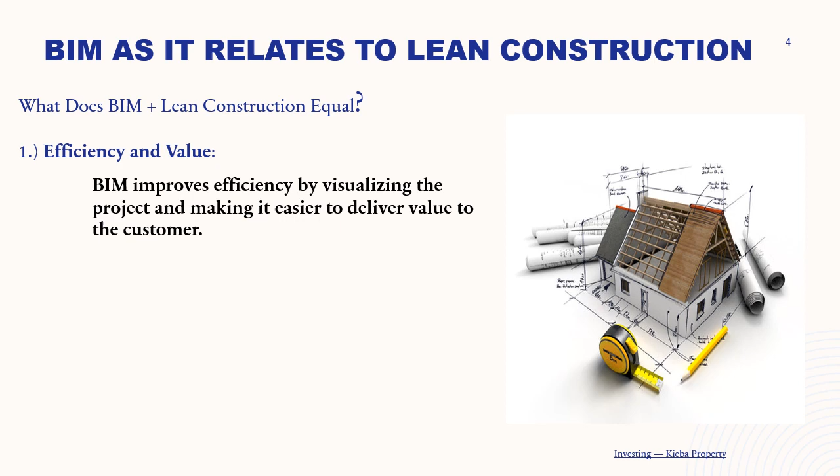How does BIM relate to lean construction? We'll start with efficiency and value. BIM allows for the creation of a highly detailed 3D model that provides a visual representation of the project inside and out. With this visual model, everyone involved can better understand what the final building will look like and how it will function, making it easier to deliver value to the customer. It can also eliminate waste through accurate planning, reducing the likelihood of design errors and changes, which are a significant source of waste in construction.

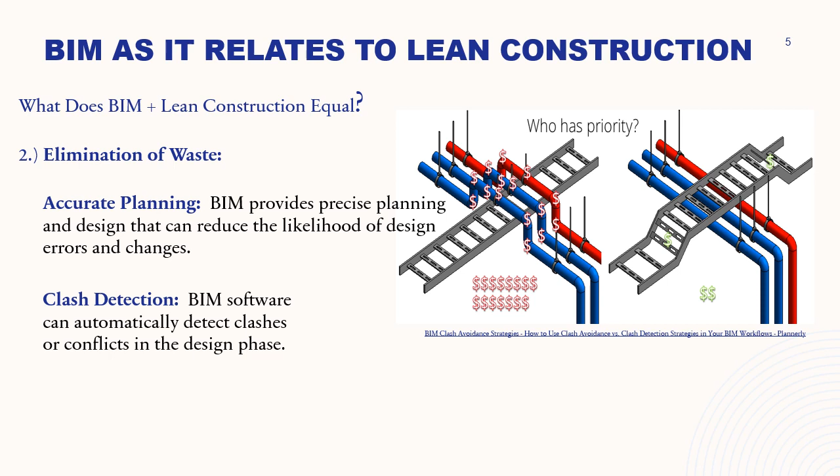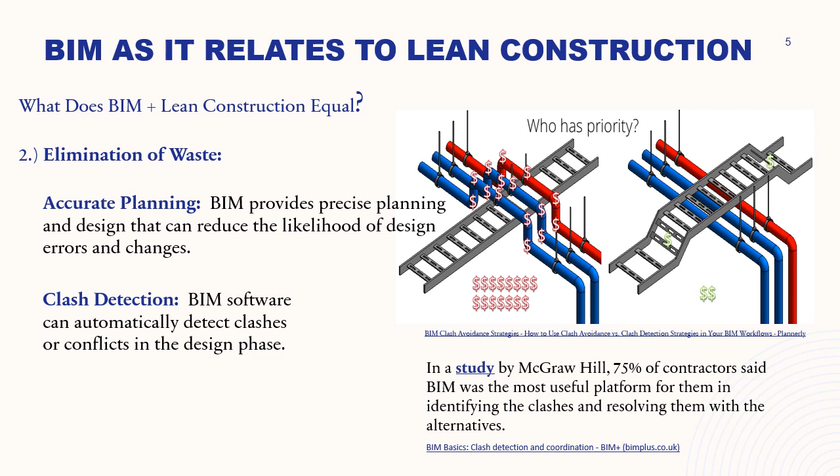The second one is clash detection. BIM software can automatically detect clashes or conflicts in the design phase. A project essentially involves engineers, architects, and contractors of different trades. However, when so many disciplines work together, clashes are inevitable. If not resolved, these clashes can result in reworks, meaning wasted time, labor, and cost overruns. A study by McGraw-Hill found that 75% of contractors said BIM was the most useful platform for identifying clashes and resolving them with alternatives.

Another principle of lean construction is pull planning, where BIM can play a crucial role. By adding a layer of scheduling information to a project, you can incorporate the time component into the 3D model, known as 4D modeling. 4D BIM enables visualization of each project stage, making project scheduling and sequencing much easier to understand, plan, and manage. It's like making sure you put on your socks before your shoes - otherwise, it doesn't work.

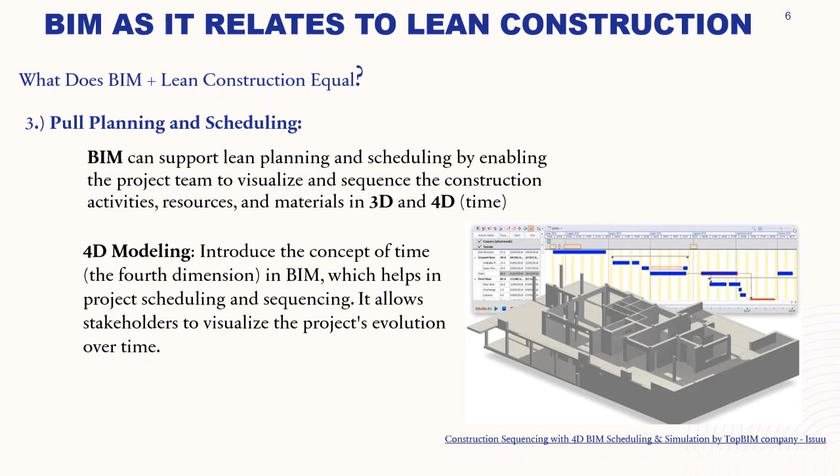Next is respect for people. By providing a shared space for collaboration, BIM promotes mutual respect by acknowledging the unique expertise and importance of each individual's contribution to the overall success of a project.

The last one is continuous learning. Throughout the project life cycle, BIM enables the collection of extensive data, including project timelines, changes, cost tracking, and performance metrics. This helps identify bottlenecks, inefficiencies, and areas of waste. Through this, we can identify patterns and trends, ensuring that lessons learned from previous projects are applied to new ones, leading to higher quality outcomes.

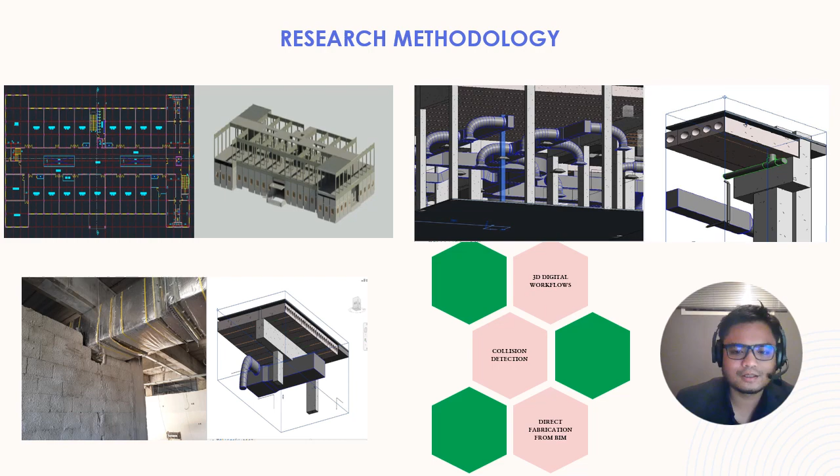The study involved applying various lean and BIM techniques such as 3D digital workflows, collision detection, and direct fabrication from BIM during the design and execution phases. The goal was to explore the benefits of integrating BIM and lean through a real project and share insights gained. This study is part of a broader effort to develop an innovative information flow process model for BIM lean projects.

The conclusion of this study found that building information modeling helps eliminate many wastes during the construction process, such as design errors, poor communication, and unexpected changes in the design during execution. BIM enables creating an accurate model rich in information and free of clashes, which helps make the right decisions during different construction stages.

This study shows that implementing lean using BIM in the design works contributes significantly to the project's efficiency. BIM helped reduce the time required for design progression by nearly 50% by reducing waiting time waste. The BIM model can help save up to 1.5 months by removing the waiting time waste and achieving lean principles.

On the other hand, design reviews and clash detections are BIM-based techniques in minimizing construction and design waste by eliminating errors detected in construction. It can be said that through the BIM model, clash detection can save at least 3 weeks and 72,460 CAD at the university project, which results from design errors.

Even though eliminating all change orders that can arise at any project will be almost impossible, it seems that BIM can reduce the cost and time of change orders, as a result of this study. The most significant reduction in change orders was discovered when BIM was implemented on the project. Approximately 17 out of 20 change orders, or more than 80%, belonging to owner-initiated changes and design errors, might be avoided using the BIM model, making the projects more lean.

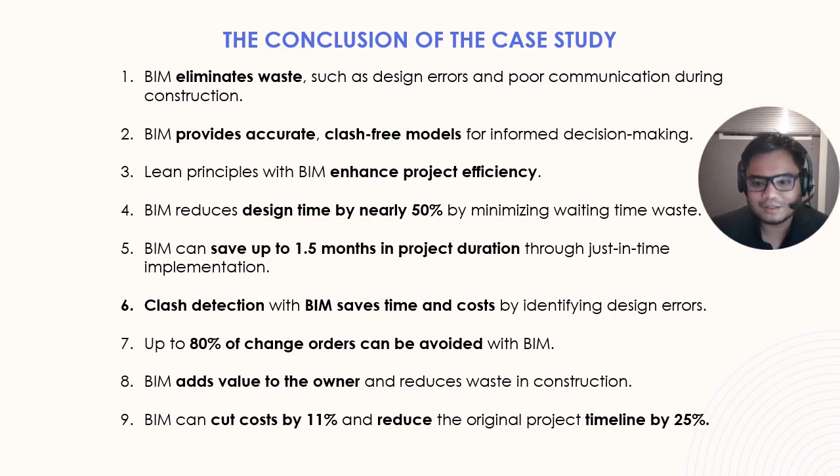Hello guys, Joey Mar here to discuss my part. Building Information Modeling, or BIM, is a digital representation of a building's physical and functional characteristics. It offers several advantages and disadvantages.

Here are some of the advantages of using BIM. Improved collaboration: BIM facilitates collaboration among architects, engineers, contractors, and other stakeholders by providing a centralized platform for using information. This leads to better communication and coordination throughout the project.

Visualization: BIM allows users to create 3D models to provide a visual representation of the project. This helps stakeholders better understand the design, detect conflicts, and make informed decisions.

Clash detection: BIM software can automatically detect clashes or conflicts in the design phase, reducing errors and rework during construction. This can lead to cost savings and faster project delivery.

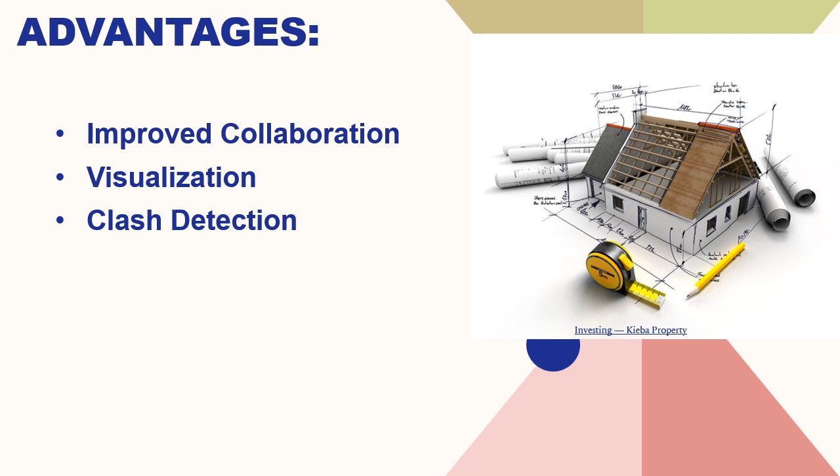Efficient design changes: Making changes to the design in the BIM model is easier and less costly compared to traditional paper-based methods. This flexibility supports design iterations and improvements.

Quantification and estimation: BIM can be used for accurate quantity takeoffs and cost estimation. This helps in budgeting and cost control during all phases of the project.

Facility management: BIM models can be used for facility management, allowing owners to efficiently maintain and operate the building throughout its life cycle.

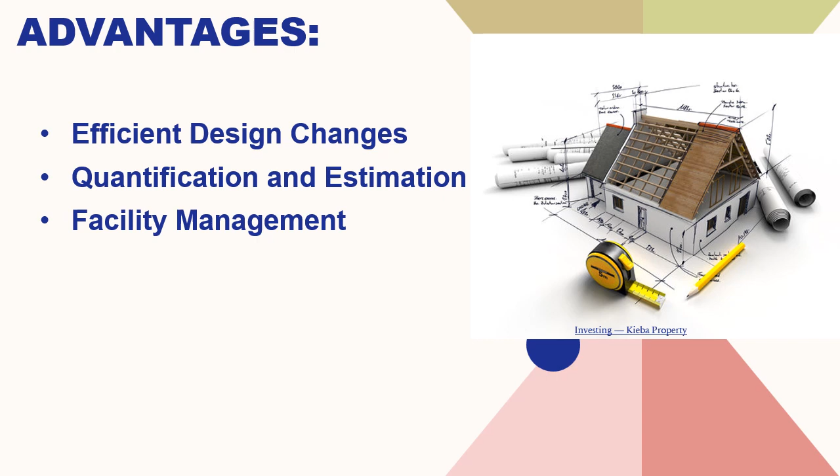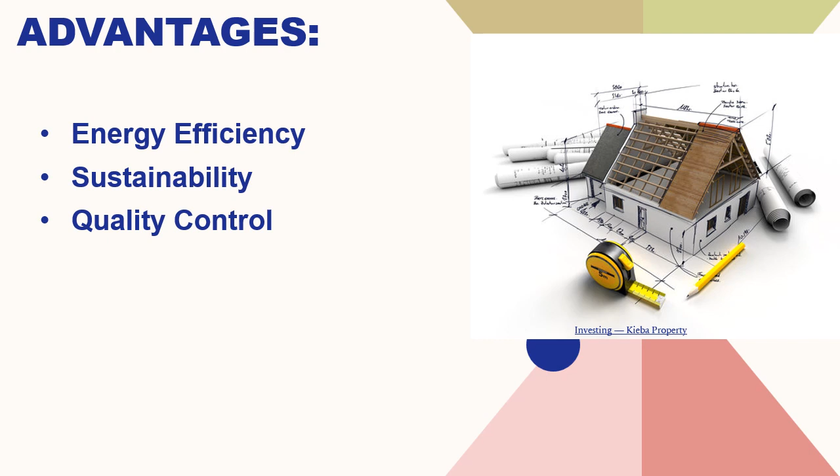Documentation and record keeping. BIM serves as a comprehensive digital record of the project, including all design changes and modifications. This can be invaluable for legal and compliance purposes.

Remote collaboration. BIM facilitates remote collaboration, allowing team members to work together from different locations, which can be especially useful during situations like the COVID-19 pandemic.

Time savings. BIM can lead to time savings in the design and construction process by streamlining workflows, reducing errors, and enabling more efficient project management.

Therefore, BIM offers numerous benefits in terms of collaboration, visualization, and efficiency, but it also comes with initial costs, a learning curve, and potential interoperability and security challenges that need to be carefully managed, which will be discussed in the next slide. The decision to implement BIM should be based on the specific needs and constraints of the project and the organization involved. For the next slides, I will be discussing the disadvantages of using BIM.

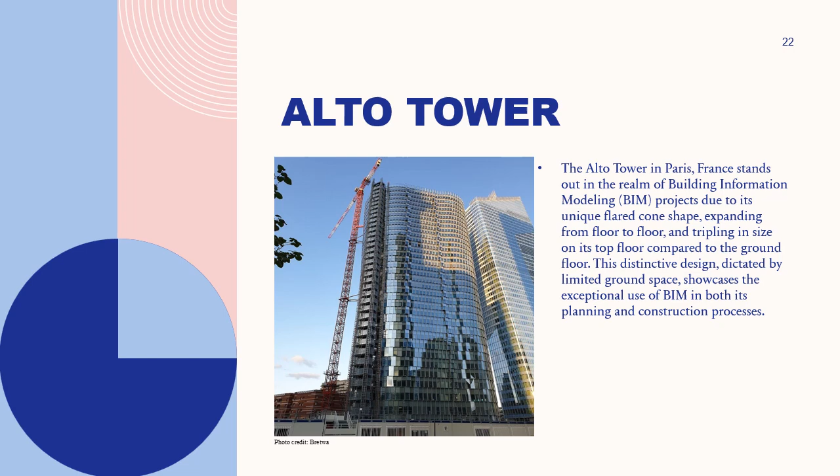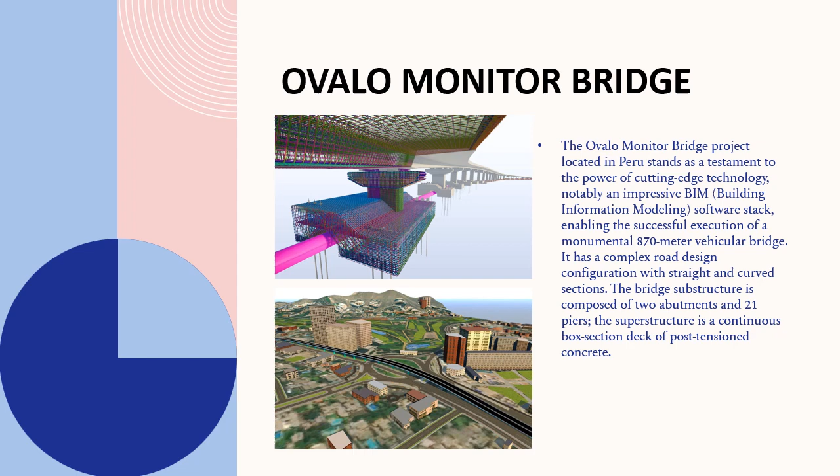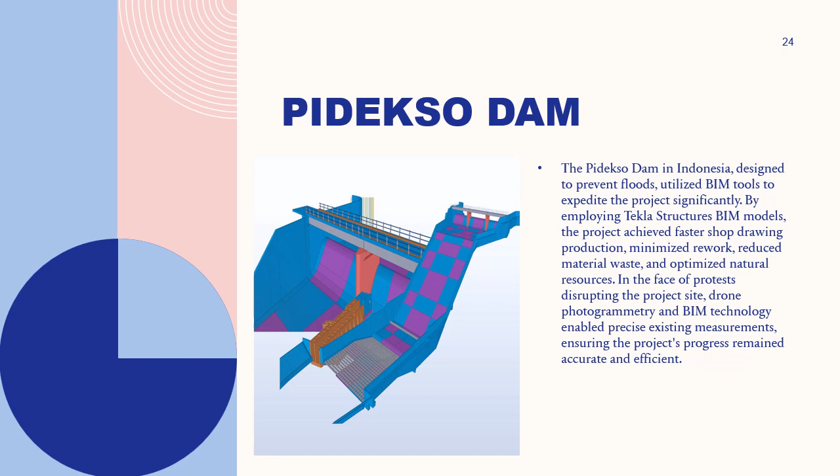Last is the Pidekso Dam. The Pidekso Dam in Indonesia, designed to prevent floods, utilized BIM tools to expedite the project significantly. By employing Tekla Structures BIM models, the project achieved faster shop drawing production, minimized rework, reduced material waste, and optimized natural resources. In the face of protests disrupting the project site, drone photogrammetry and BIM technology enabled precise existing measurements, ensuring the project progress remained accurate and efficient.